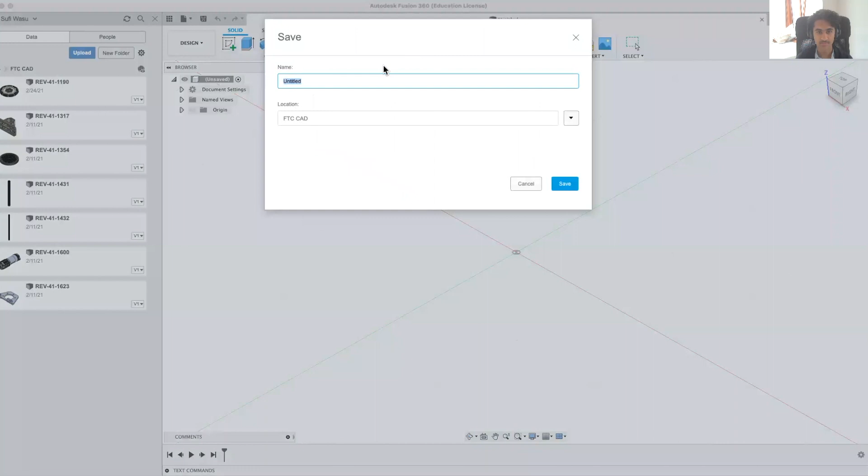But the first thing we need to do is create the file where our drivetrain will be made. It's important to name this file, otherwise you won't be able to edit it. So I'm just going to call it Drivetrain, and it is automatically saved in the folder we created last time.

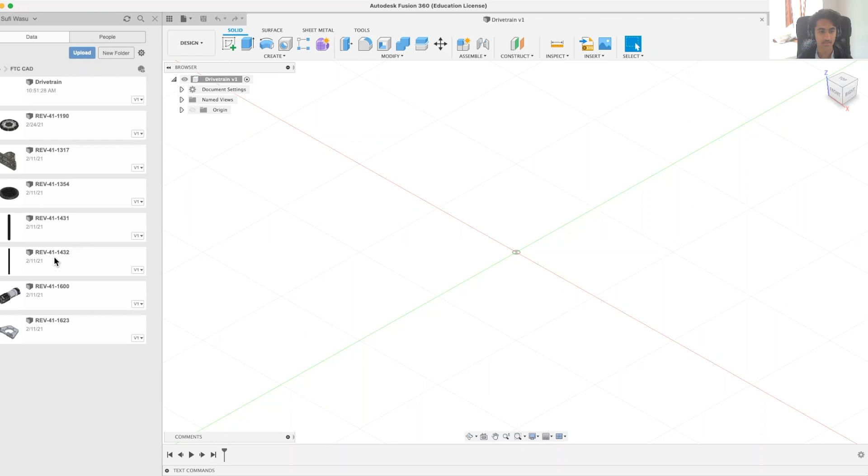Now the first step is to import files necessary for the drivetrain. The first file we're going to import is our 420 millimeter long extrusion. Its ID number is REV-41-1432. To import it into this design, simply right-click on it and select Insert into Current Design.

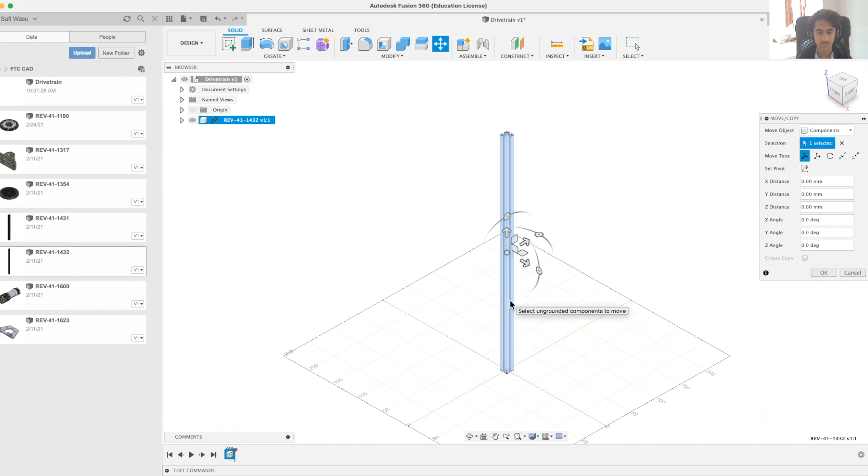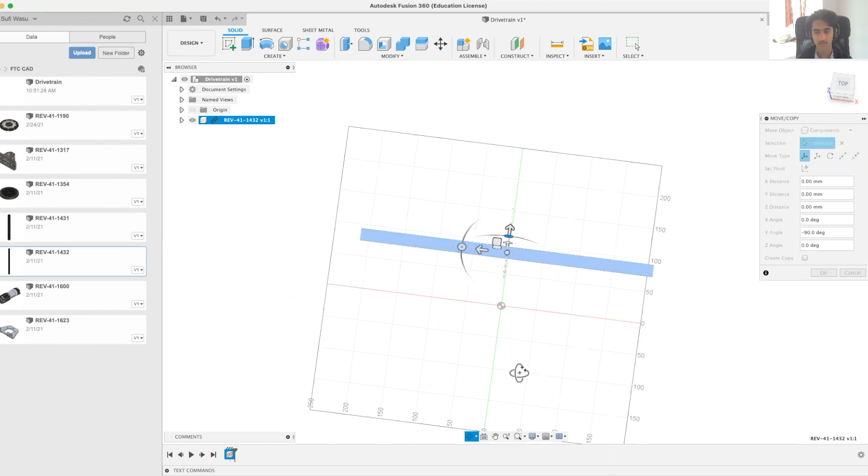You can see we now have the extrusion here, but don't click OK right away. We need to make sure it's in the correct orientation. Since this will be the backbone of our drivetrain, this should be at a 90-degree angle, and do not move it in the X or Y axes, as it should be aligned perfectly with the Y axis, and we'll get into that later on. Once it's rotated, you can click OK.

As you can see, you now have the component floating in space. With components, you can simply grab them and drag them around anywhere you like, up or down.

Since this is the base plate from which our drivetrain will be built, it would be bad if we can move it around. To prevent this, we're going to ground it in place, meaning that it cannot be moved unless you unground it. To do this, right-click on the component and simply select Ground.

Now, no matter how hard I try, I cannot move this extrusion around.

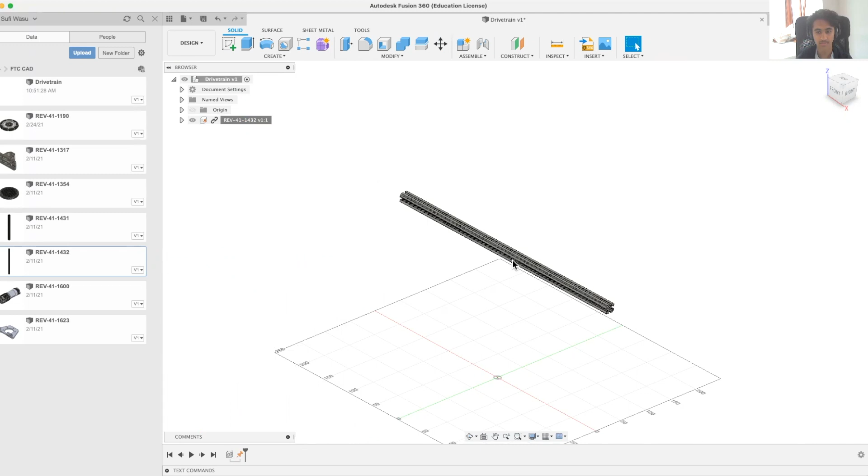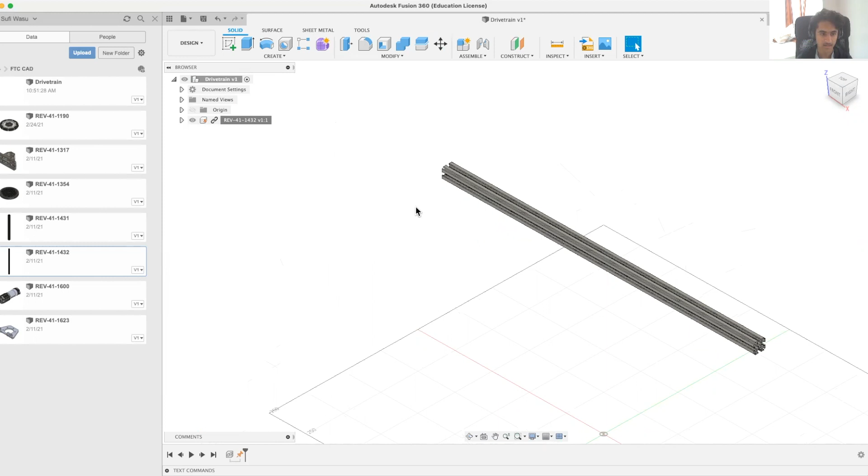The next important step is to create the two side rails coming off from the drivetrain. The way we're going to make this drivetrain is we're only going to CAD one half of the drivetrain and mirror it onto the other side. This will save you a lot of time and unnecessary headache. So to do this, simply import the next file, which is a 420 millimeter extrusion.

Rotate it so that it's perpendicular with your existing bar. Its location does not matter too much yet, since we are going to be joining it later on.

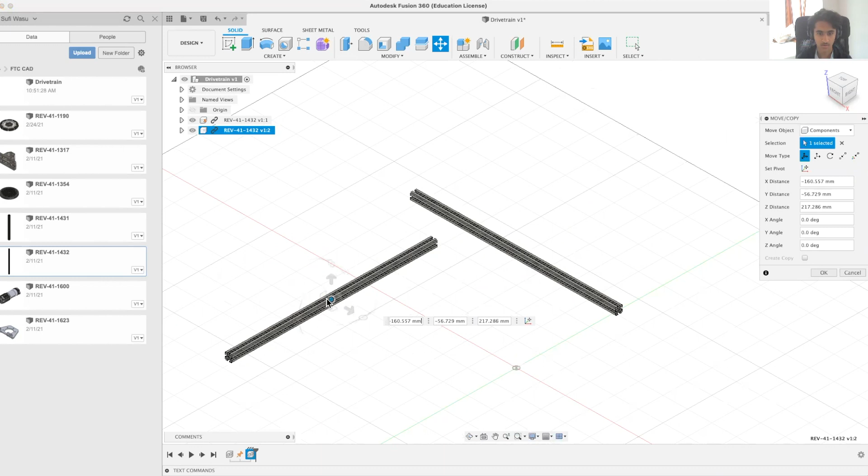Now that it's imported and in the correct orientation, we're going to link these two extrusions together with a rigid joint. Joints connect these two parts together and mean that when one part moves, everything moves with it.

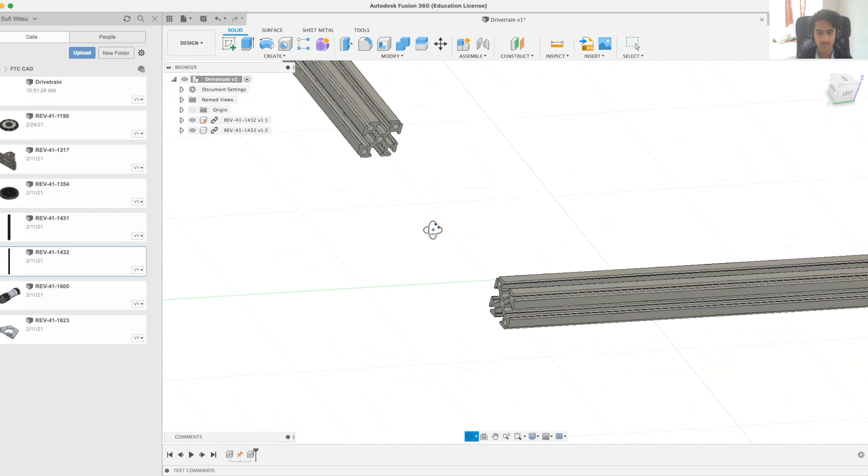To do this, simply select the face on the extrusion, as you can see here, and select the face on the grounded extrusion where everything will be built.

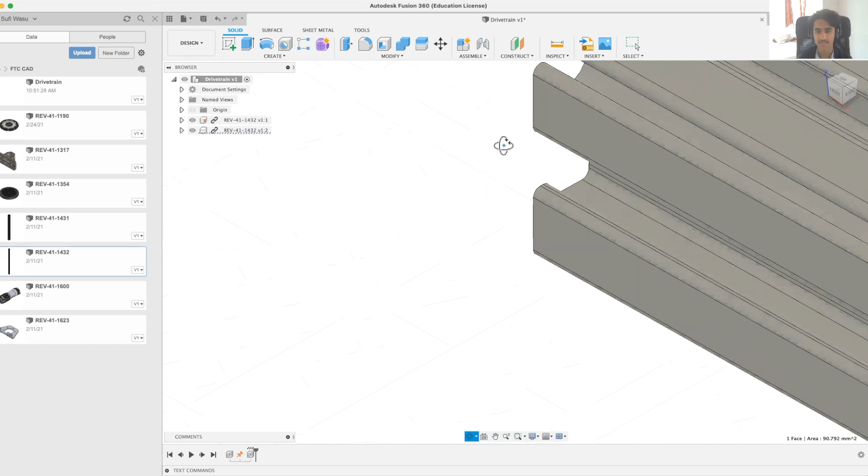It's easiest to select a face that is in the center of the extrusion, so there's one less area to calibrate later on. I like to select this face since it runs right through the center of the extrusion. Make sure you are holding Shift when you select the faces so that both are selected at the same time.

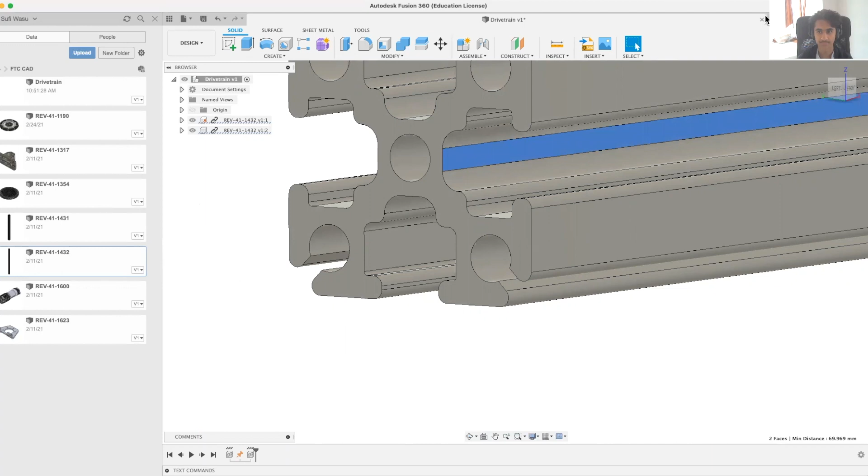Next, simply come to Assemble and Joint, and as you can see, they will by default snap together. Now, you can drag this extrusion to the end right here to lock it in place. Make sure they're contacting like this.

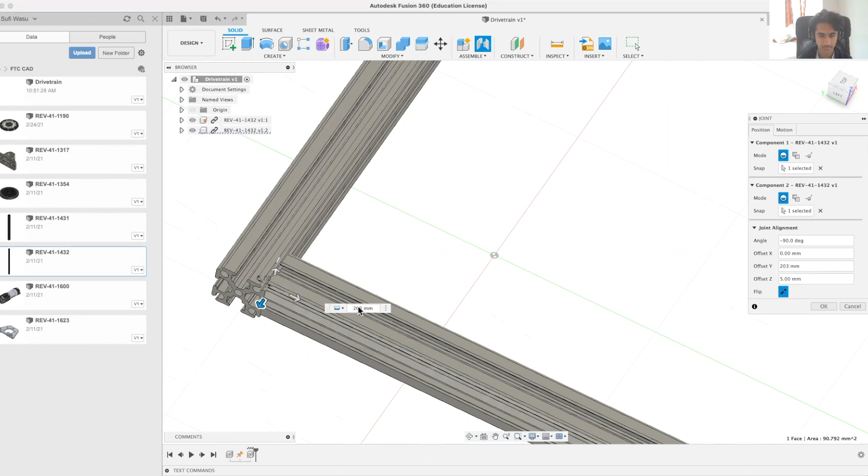You can play around with the values if you need to. Before you save your joint, come to motion and make sure it's set on rigid joint. If you preview the joint motion, you should see they're rigidly locked together and should not move. Once that is done, simply press OK.

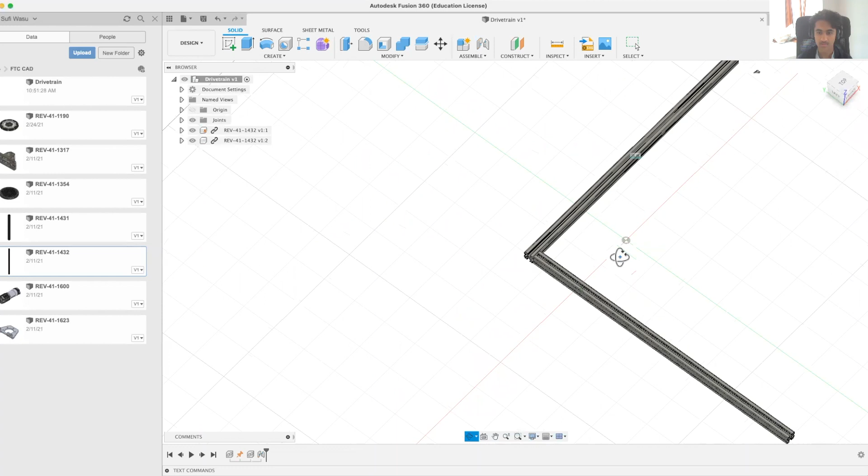So you've now created a rigid joint. What this means is that if you unground your base extrusion and move it around, the two components will move together. And just reground that extrusion.

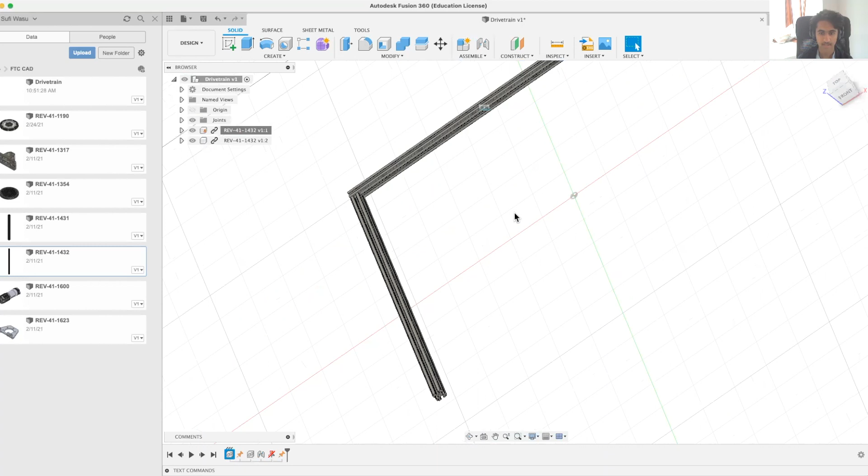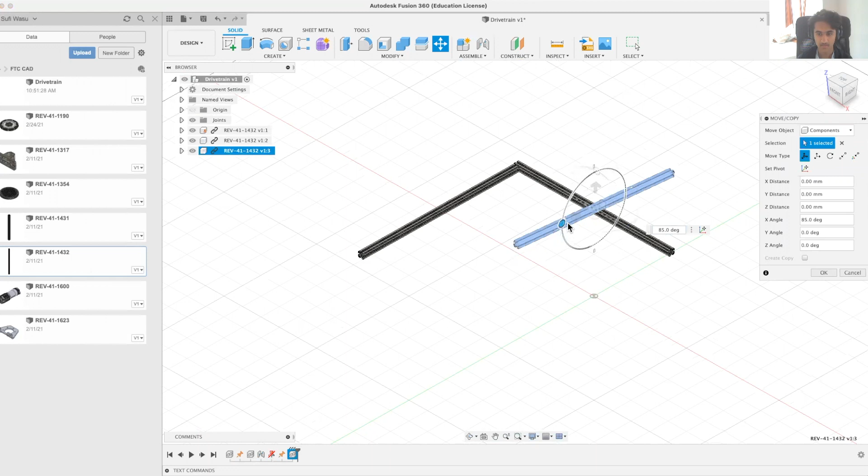Okay, the next step is we need to add one more side rail in over here so that the wheels are supported as well on both sides. So it's the same procedure as last time: insert the extrusion, rotate it to the correct angle, drag it out. Location doesn't matter for now.

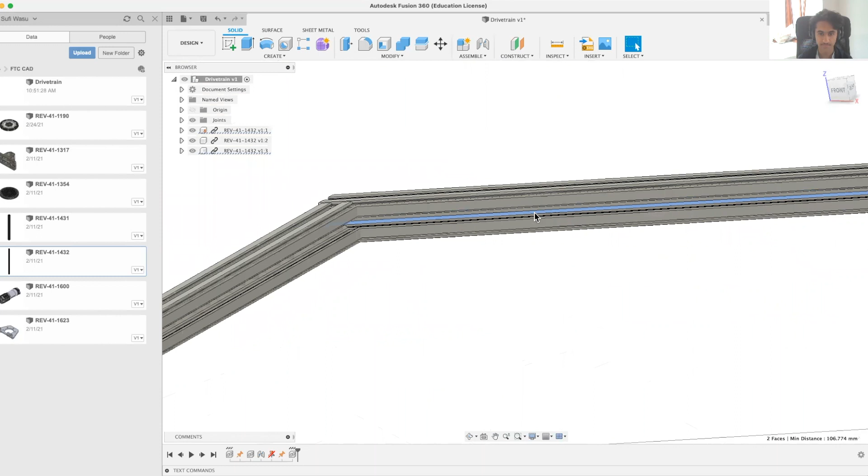Next we need to select both the faces to create the joint. Again, remember, select the face in the middle of the extrusion, assemble, and joint.

Not sure what's happened here, but I can just cancel it and try again. I selected the incorrect face. So come down here, select the face of the extrusion, and make sure to select the correct face on your drivetrain design.

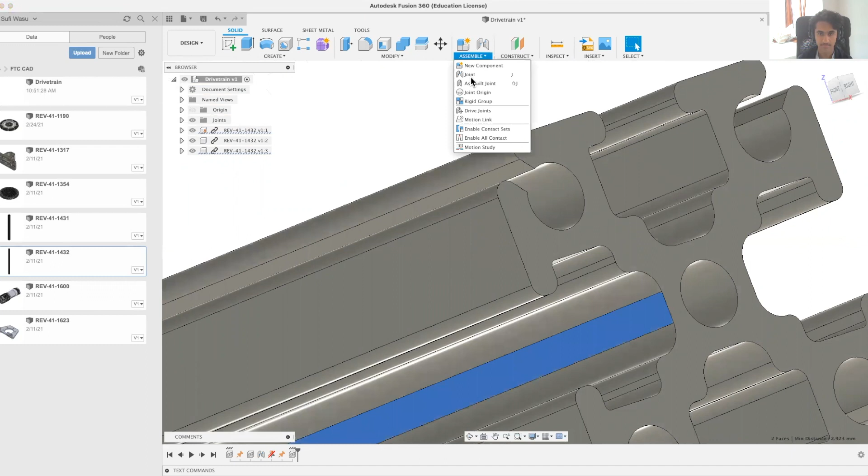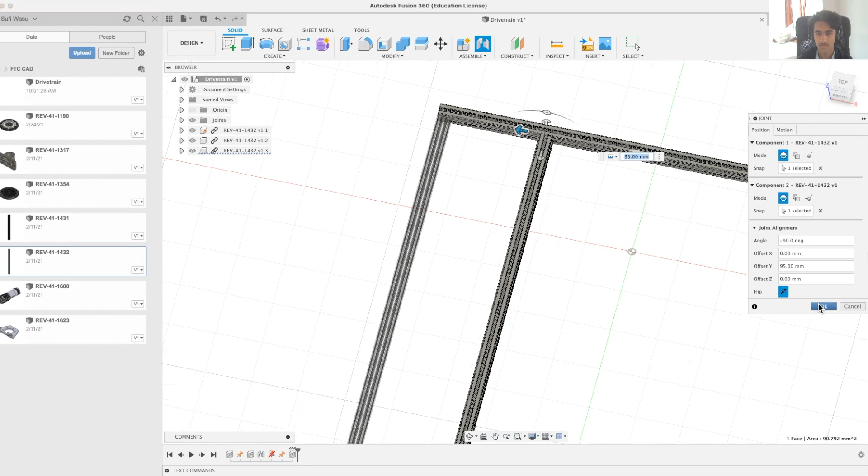You can see it's done correctly this time and it's been snapped in place. So we're just going to move it over until you have a Y offset of 95 millimeters. Now, make sure as well that the two parts aren't inside each other, so just drag it out to prevent that, so they're just touching.

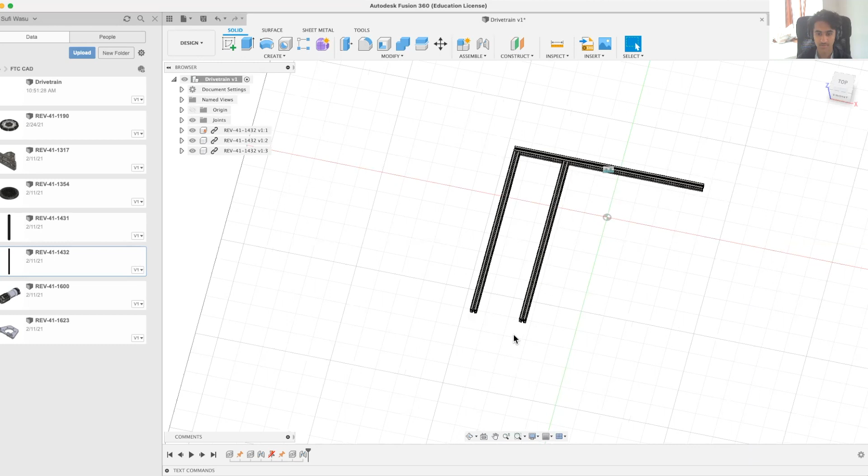You now have two guide rails and a base piece on your drivetrain. The last element on this half is a brace to connect the two rails at the front. To do this, we need to know the exact size that it should be. So we're going to learn about the inspection tool.

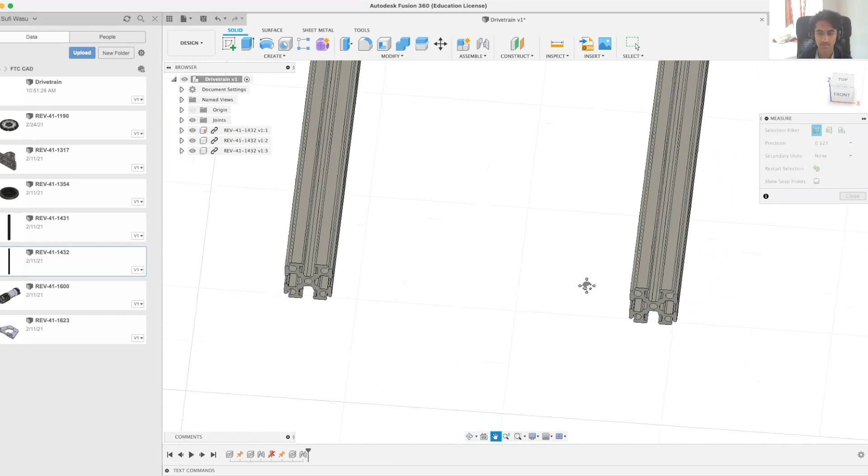To use it, simply click Measure on the top of your screen. Now this allows you to find distances and areas on your design. To use it, simply click a line on the end of one of the guide rails. As you can see, it shows you its length.

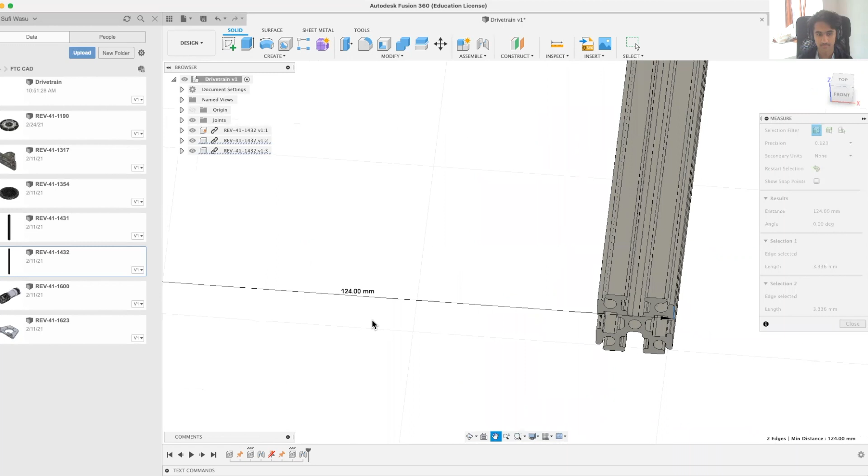Hold Shift and click on another rail, click on the other end of the other rail. As you can see, it gives you the distance between them of 124 millimeters.

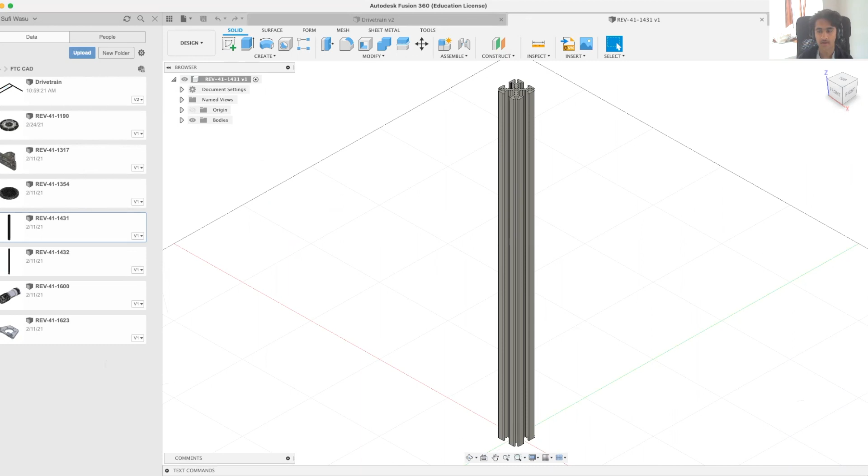We now know what length the extrusion needs to be, so we can create a custom length. To do this, simply come back to your toolbar, click on any one of the extrusions you've imported, and now we're going to modify it to create our custom length of 124 millimeters. To do this,

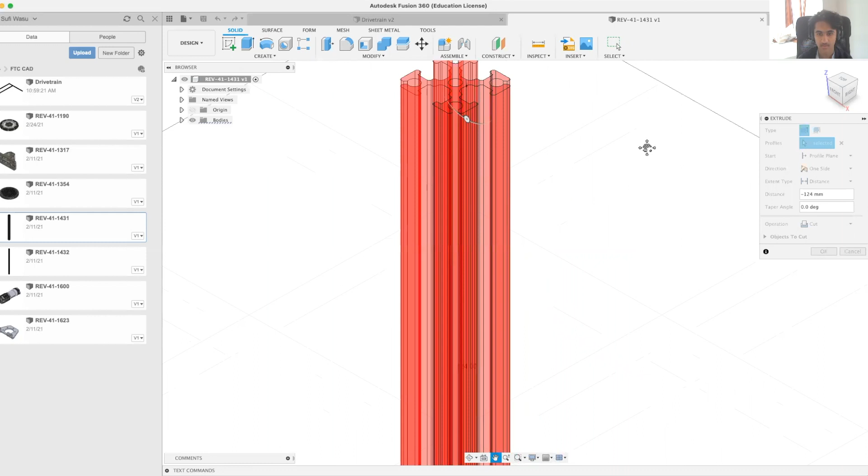simply click on the face of the extrusion and come to create and use the extrude tool. We want to make this 124 millimeters long. But simply typing in negative 124 won't help us, since that's not the length of the piece we need to create. We're just cutting out of the existing extrusion.

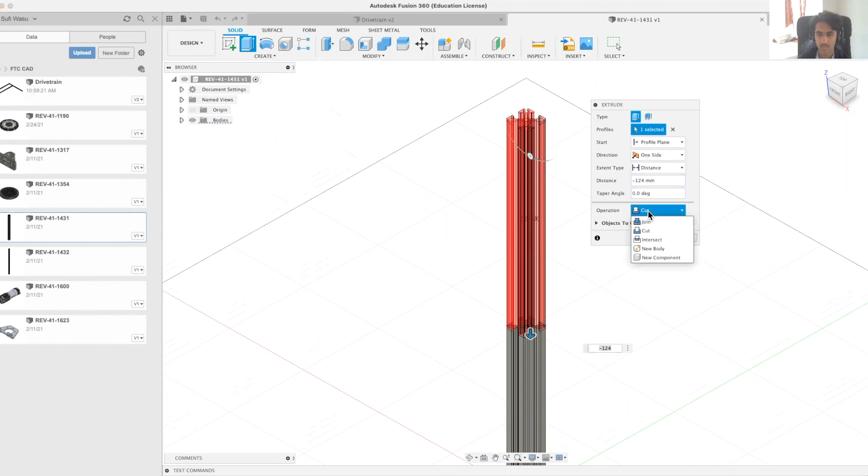To remedy this, come over to the Extrude tab and Operation and change the tool from Cut to Intersect. So now the only part that will be saved is the intersection of your extrusion and the existing component, which is exactly 124 millimeters long, which we can verify with the measure tool, length 124 millimeters.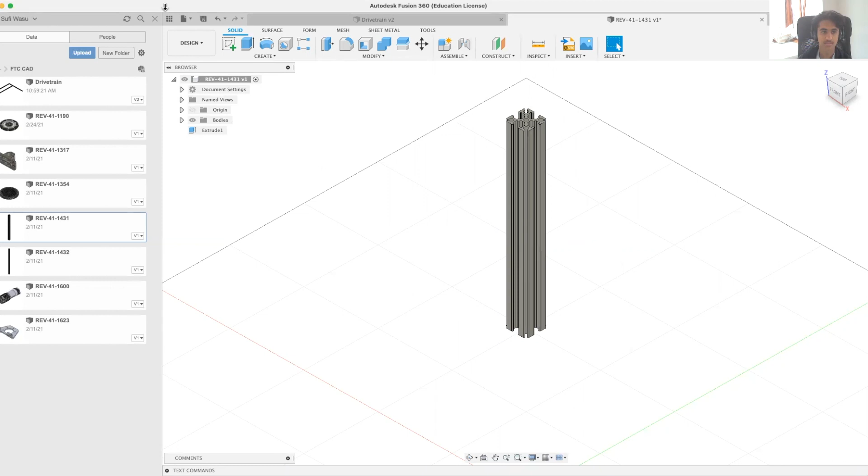Now that this is done, you need to save the file. Go to File, Save As, and it's important to label it so you know what it is. So save the file in your folder and come back to your drivetrain.

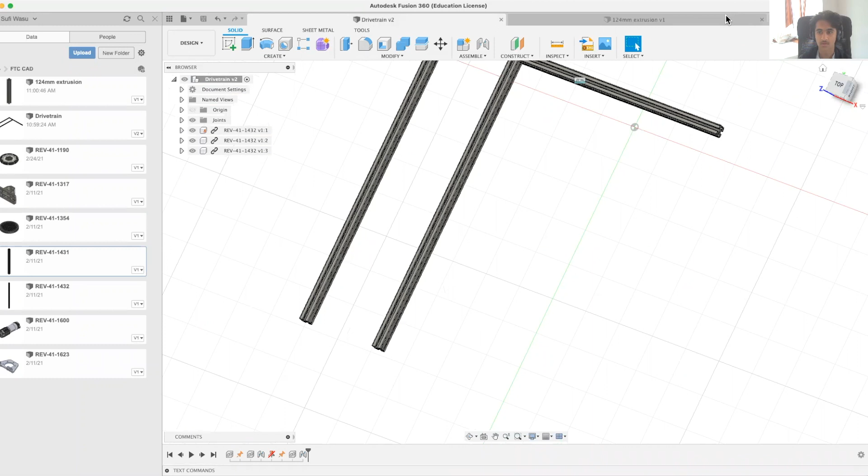Now it's the same as with all of the other extrusions. You need to import it into your current design and make sure it's at the correct orientation. This time, we're going to rotate it this way and move it closer to the two guide rails.

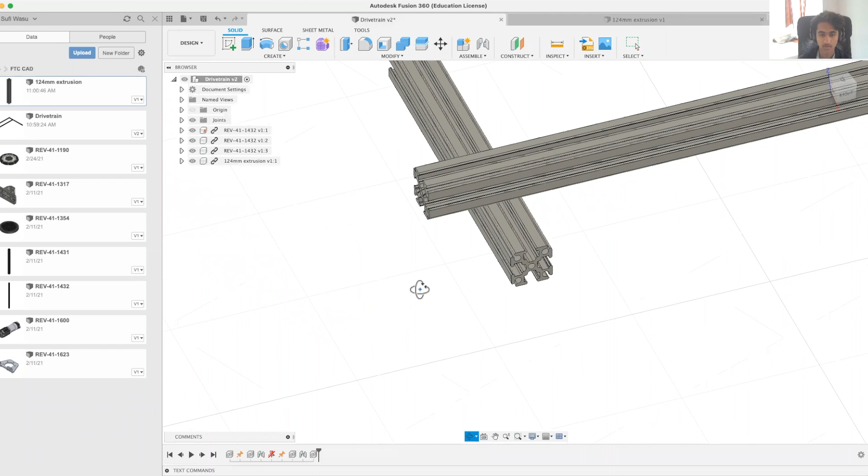Now we're going to attach this extrusion here to the two guide rails, and everything should be locked together. So it's the same as before, except this time we're going to select the face in the center of the extrusion first, and the face of the guide rails second.

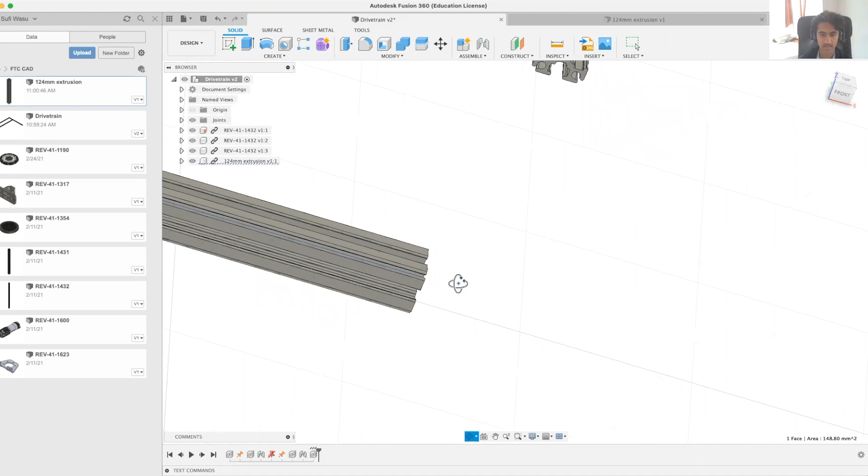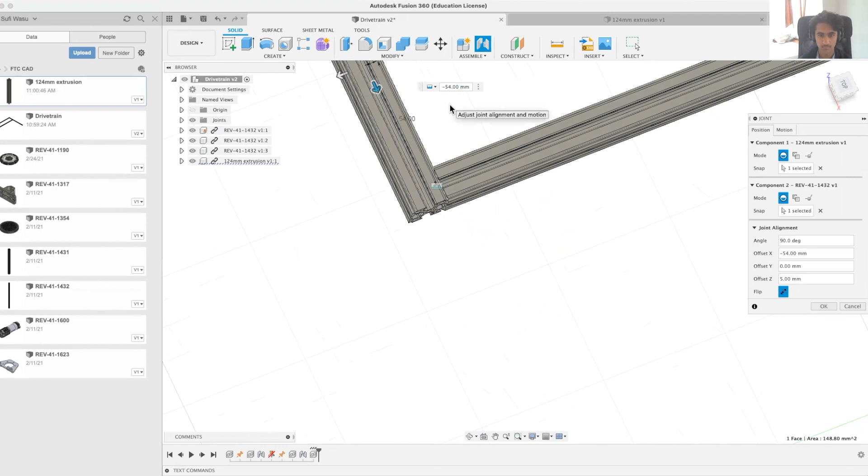And it doesn't matter which guide rail you choose to create the joint with, they will all still be locked together. Come to assemble and joint. As you can see, it's very similar to the other side, so you just need to move it out and move it across.

So you've completed one half of your drivetrain. To complete the other half is very simple. Now you don't have to import all the files again and do all the measuring again. You can simply use the measure tool, the mirror tool.

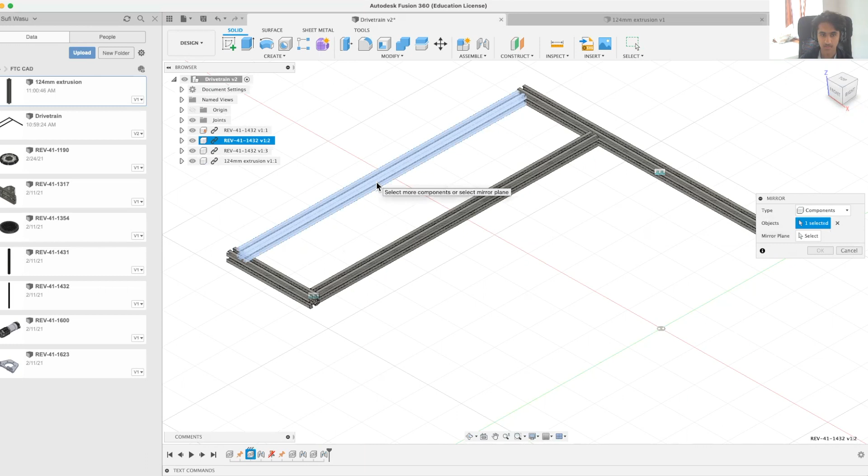To do this, come to create and mirror. Once here, click on the component, make sure the type is selected as components. Click on the component you want to mirror, and the plane should be the y-axis. That's why it was so important to ensure that your first extrusion is centered on the y-axis. Once you've done that, you can see it creates a new component mirrored exactly the same distance as the original from the y-axis.

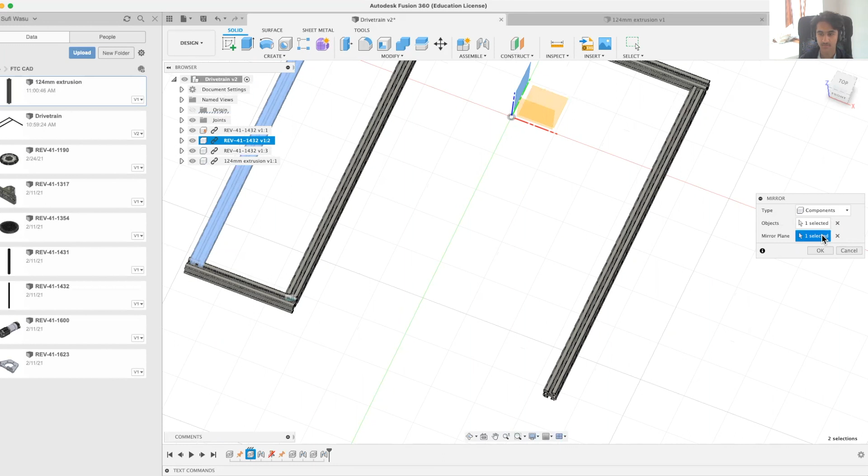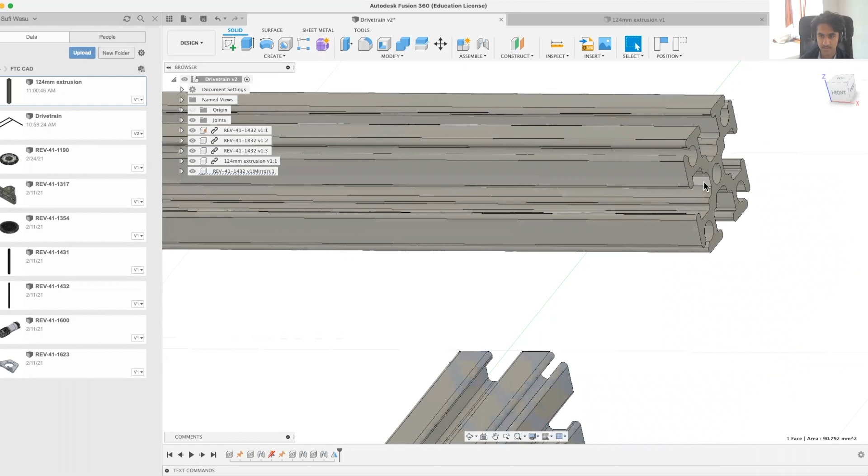Unfortunately, once components are mirrored, the joints are not saved with them. So you need to create all the joints again in the same way. So come over, select the face, select the second face, and assemble a new joint. Make sure to select both faces properly.

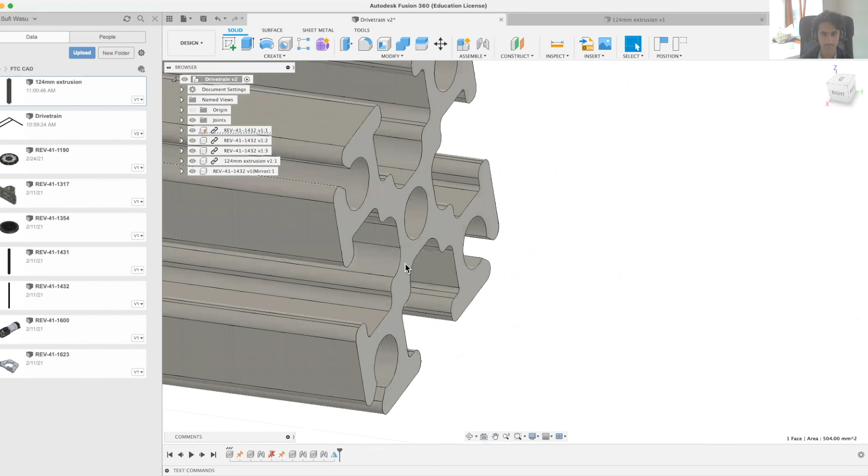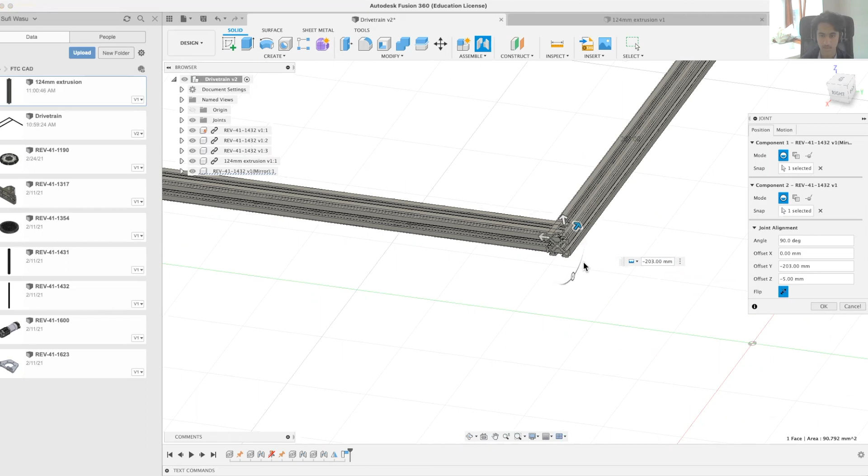There we go. Move it all the way across. And make sure that the extrusions are not intersecting. Now all that's left to do is to do the exact same thing with your two other extrusions.

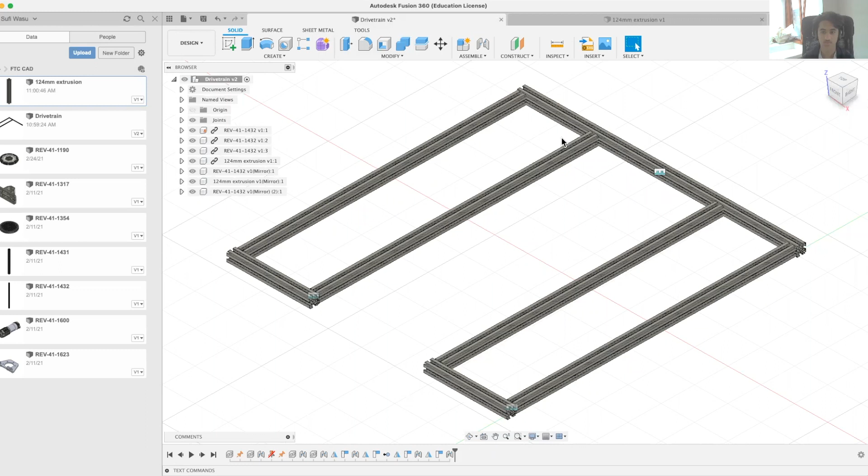And that is it. You have just CADed the frame of your drivetrain. Everything has joints, everything is grounded together, and if one thing moves, the entire drivetrain goes with it.

That is all for today. Next time, we will be adding in the wheels and the bearings. See you then.